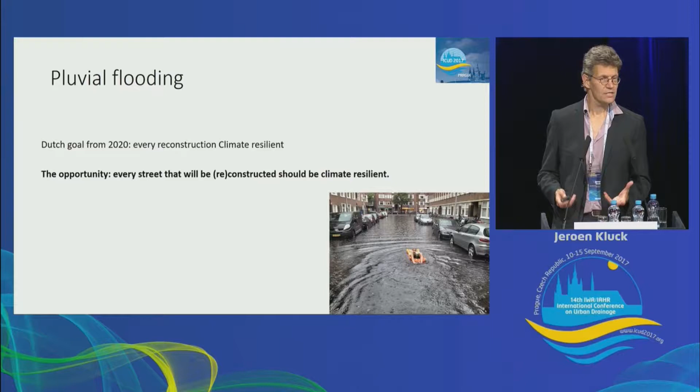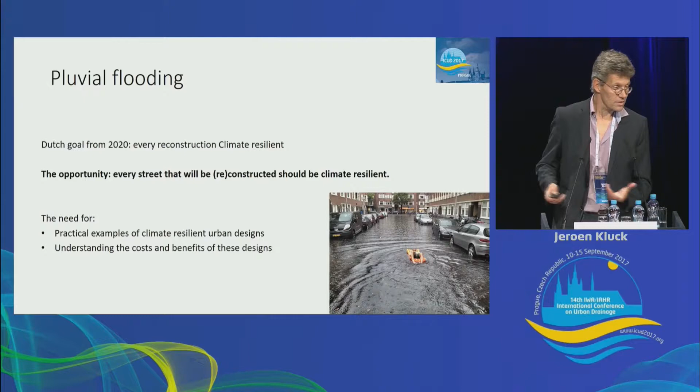So this is something we want to do, and of course this gives rise to some questions. For example, we need practical examples. How are you doing this? And of course we want to know how much does this cost, and do we really want it? So, to help with this, that's what I made this book for, and okay, help you with the title: The climate also fits in your streets. So we show that by doing simple solutions, a heavy rainfall can also be stored in the street or discharged in the street without big problems.

Now, we started making this book, and we are at the University of Applied Sciences to help the municipalities on starting moving, because many municipalities say, yeah, climate change, now there are so many other important things, why should we bother now? Or some cities, they say, oh, we don't have a climate problem. If it's raining very, very heavily, it doesn't give any problems in our city. Or they say it costs too much money. So we wanted to show that this is not really true, that it doesn't cost too much money, and that it's easily possible.

Now, the approach we used is that we defined characteristic typologies of neighborhoods, of urban areas, and we wanted to show for each of those neighborhoods how you would design it in the traditional way, and how you would design the street in a climate resilient way. We did focus on urban flooding, pluvial flooding, but later on we also did research on heat stress and how you can design in this way. And what we did is we designed it and we calculated the cost and the benefits.

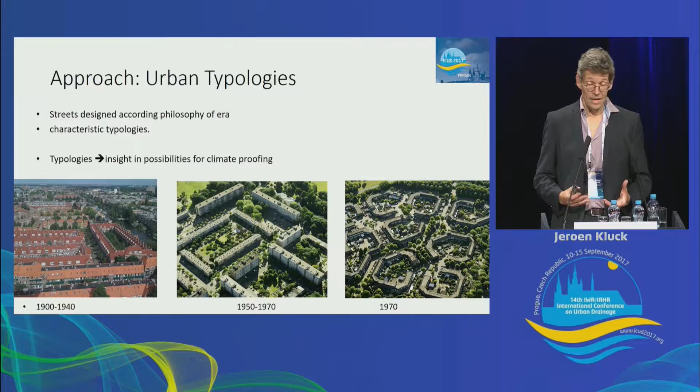Yeah, this works. And later on, they started to build high-rise buildings, like here. And even later, they started to provide more green in the area, more living areas with streets where no cars are standing. So those are very different, and you can imagine that those different typologies also behave differently at a very extreme rain event.

Another example is the community neighborhood. In fact, we call them cauliflower neighborhoods because of the shape. So here you see more green in the urban area. So the question is, one more, okay. This is what we call the garden village, and even more green. And then the approach is how can we design this in a standard and a traditional way.

Now in the Netherlands we have, for a large part, a flat country, and therefore we have made more or less the design that about 20 millimeters in an hour rainfall can be stored and discharged by the sewer system, and if there's more rainfall, then we don't even look at what's happening. That was before, 5 years ago. And now slowly we're starting to think about what will happen if there's a more heavy rainfall event. And this 20 millimeters in 1 hour is happening once every 2 years, and maybe it will become once in 1 year because of climate change, but okay, that's the idea.

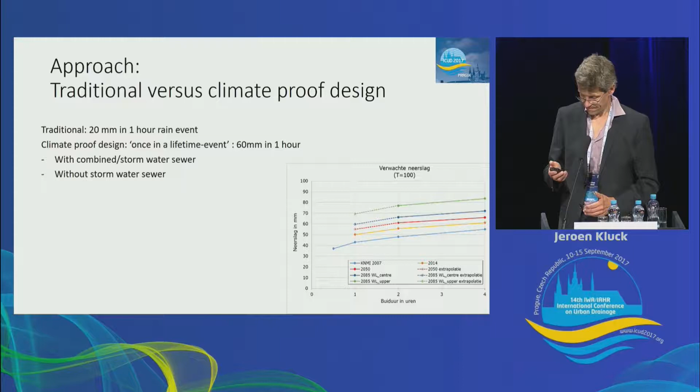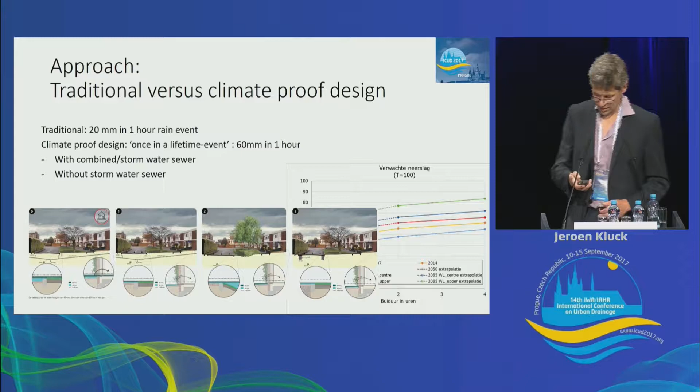So we made 4 designs, the standard situation with a combined sewer system, and then 3 others. I will go into this. And then, of course, we estimated the costs and benefits. Okay, it's a bit boring. You just calculate how many pipes, how many stones, how many curbstones, everything, and you do something about an estimation of the damage costs. And so we can calculate it in many ways. Okay, we assumed some things, and I'm confident it was good enough. And so we have costs and benefits of the different designs. And later on, we also estimated the value, the benefits of green measures.

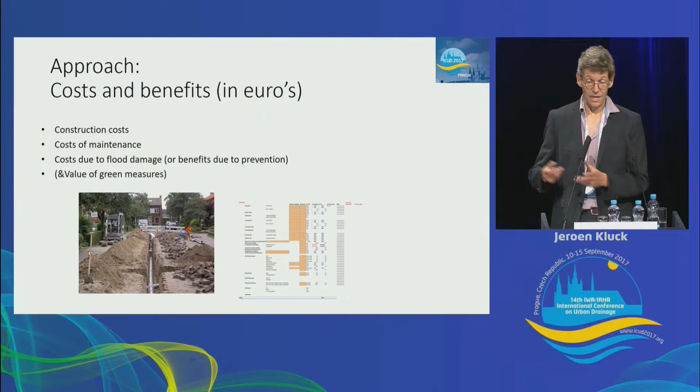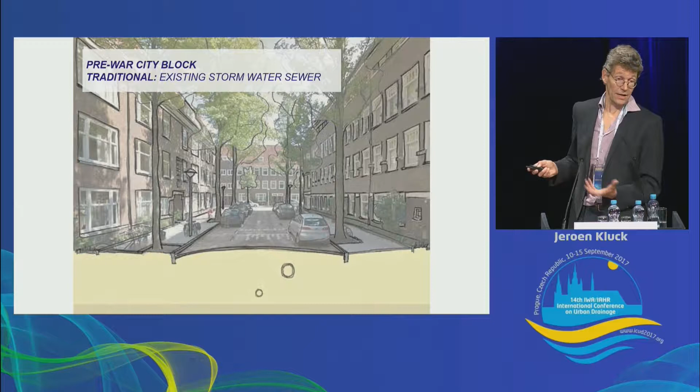So we have 2 examples. The first one is this pre-war closed building block, densely built up, and the standard situation would be this. And now, if there would be heavy rainfall, like once in 20, once in 40 years, then the water would simply just go over the curbstones and go into the houses.

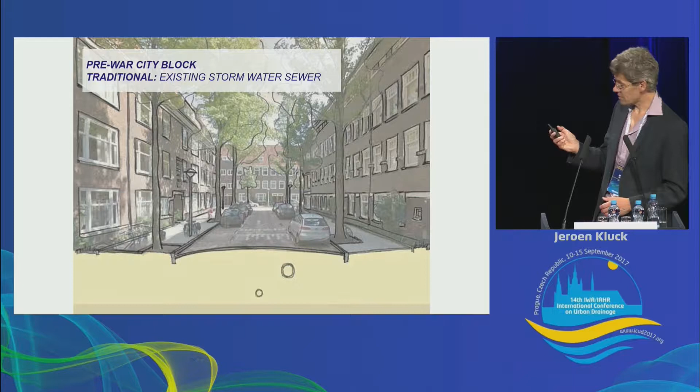But we said, okay, the climate-proof situation would be one in which the street level would be a bit lower. You can see it going down. And at the same time, I put in the amount of water which would be there at this extreme event, the 100 years event. And you see the water doesn't reach the houses here. So we designed it in such a way, by lowering the street, that there was no flooding. And in this case, we still have a separate sewer. Okay, it doesn't matter. That's a rainwater sewer at least.

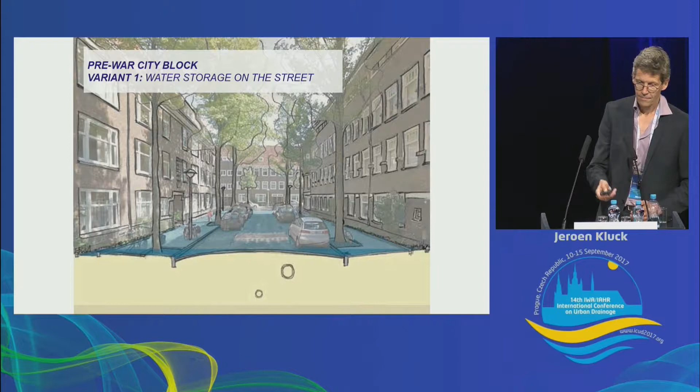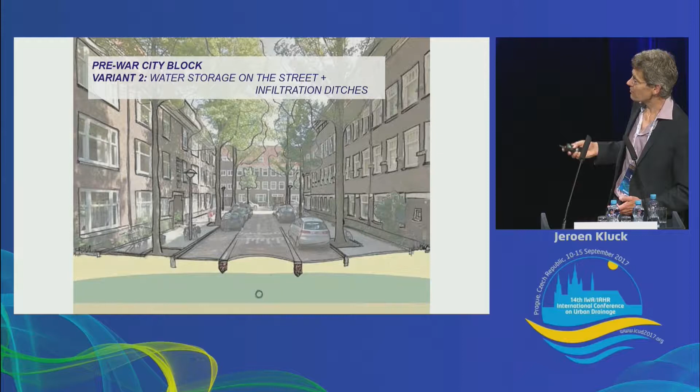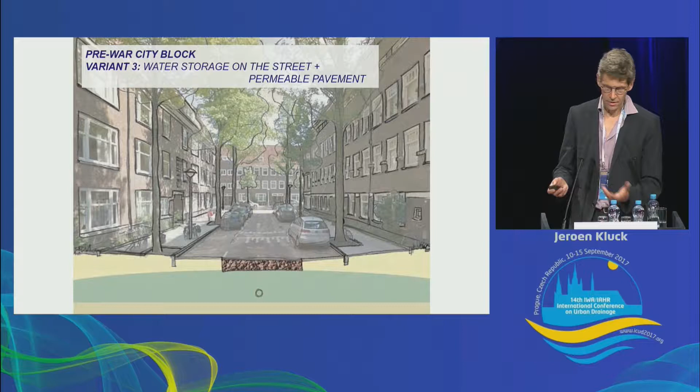And for another design, but then without a rainwater sewer, we made it with some infiltration trenches along the road. And a third one, we made with pervious pavement in the road and some infiltration material, bringing it into the ground. So we made several designs, and we compared how much they would cost, and we already compared how they function. So the climate-proof designs are functioning well, and the other ones might have flooding.

So here's a comparison of the costs. You see in red the damage costs, so there's only damage in the traditional design, a very small one in the climate-proof designs. There are maintenance costs and construction costs. And what we did is we calculated all the costs for building, for taking out, for rebuilding during 100 years. And we added them, or we calculated the net value. So you see that all of them cost almost the same amount of money.

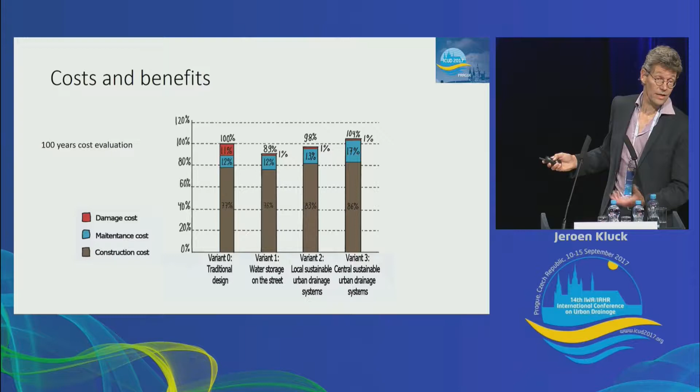And because of all the uncertainties, we say this can be climate-proof for the same amount of money. It doesn't really matter if one is really more expensive than the other one. They are almost in the same range. This one seems a bit cheaper, this with the rainwater sewer, than those two. But also this might develop more, and like we had this morning, if there's more done on pervious pavement, maybe pervious pavement will get much cheaper in the future.

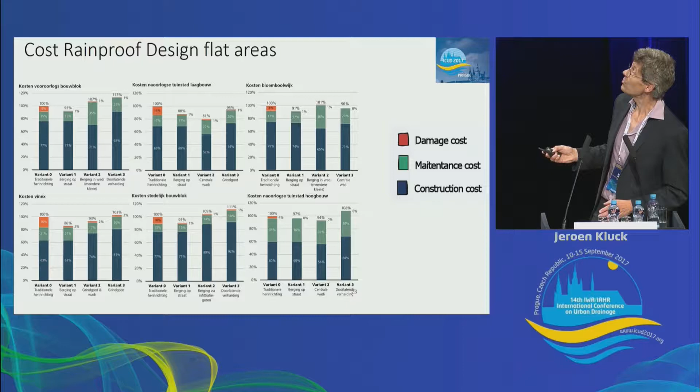So we did this for this example, and because of the time I don't show all the other examples, but we did it for 6 examples here. These are for flat areas and also for some sloping areas. But for the flat areas, we always saw that the cost for climate proofing was almost about 100% if you account the maintenance and the building costs. So we concluded in the Netherlands we can retrofit the living urban area in a climate-proof way for the same amount of money.

So I think that's a very important message, and this would help the municipalities to do this. So that's why we wrote it in the book, and that's why we try to convince the municipalities to start looking at this. They don't really have to do it in this way, but they can use this to be more enthusiastic about the subject.

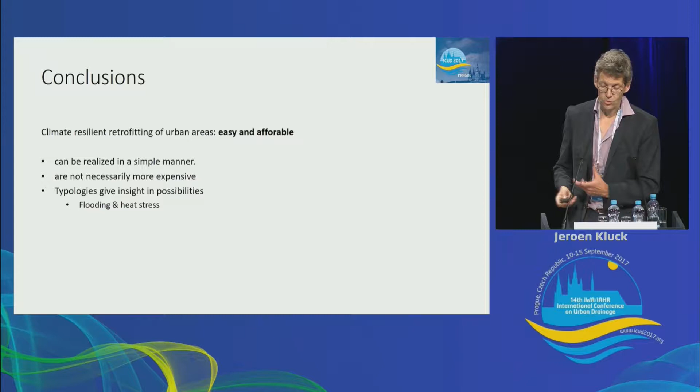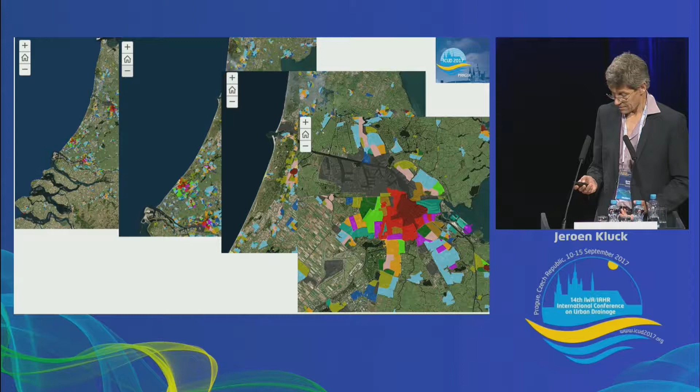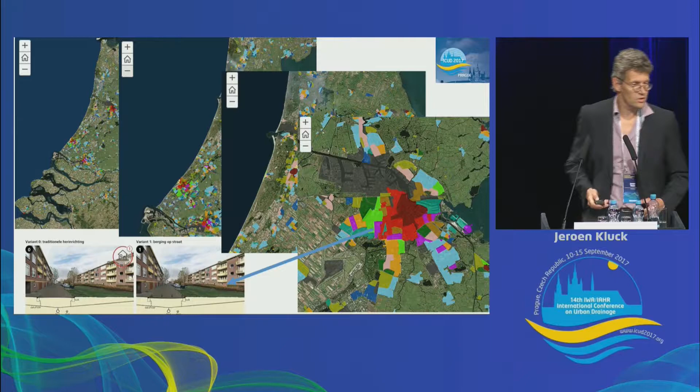And for example, this green area is more or less high-rise. And you say, okay, if this is this area, you can look for this kind of solutions to solve your problems. I think I'm just in time with my last sheet.